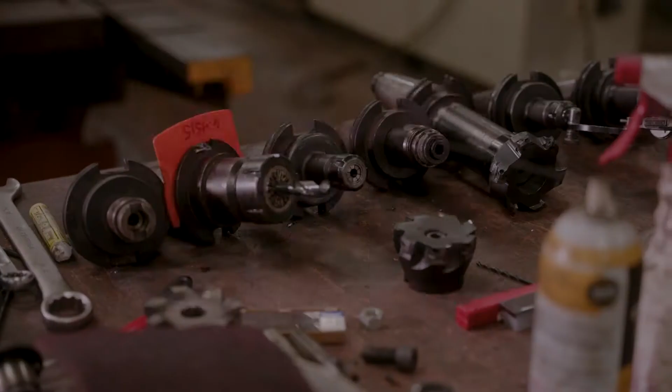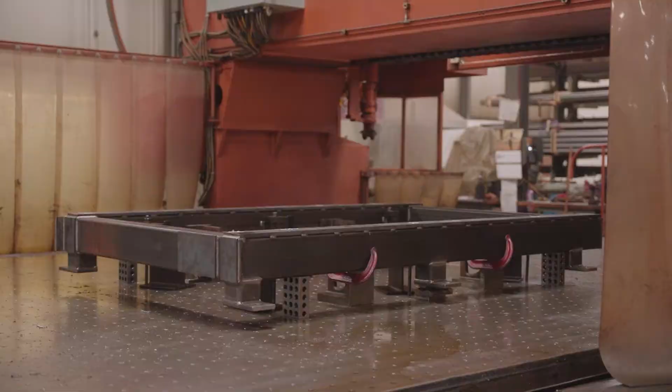Our niche is the woodworking industry. My father, Tom, started out in the woodworking industry and had a natural interest in engineering and building machines, so he married those two together, and that's why we're building woodworking machinery.

The equipment that we build easily translates to other industries as well. We deal in a lot of different sectors within woodworking: countertops, kitchen cabinets, doors, windows, hardwood flooring, building siding, all sorts of different products.

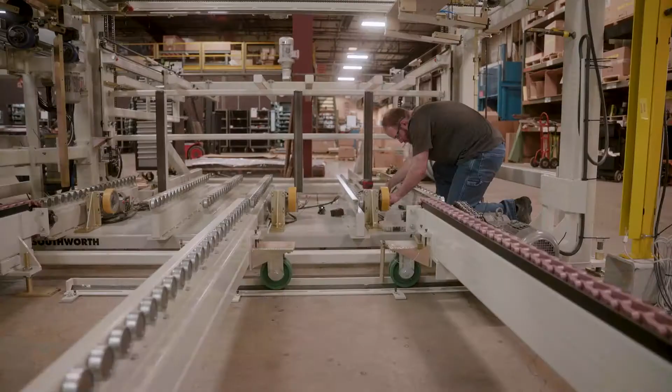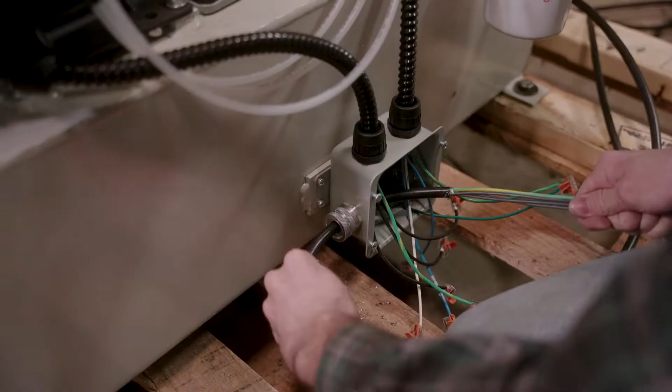We want to build the highest quality machinery we can for what the customer can afford. We also design and build it as if we have to run it and maintain it ourselves. It was his goal to provide a specific need in the industry and to make machines that were affordable but yet dependable, reliable, and machines that could be maintained with basic equipment, basic tools.

It's quality equipment. If you build it right, it'll last a long time. It's not throwaway equipment where you expect to get 5-10 years out of it and cut it all apart and make it into scrap metal.

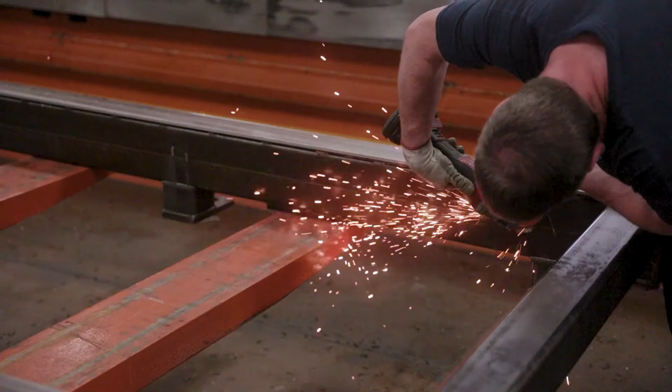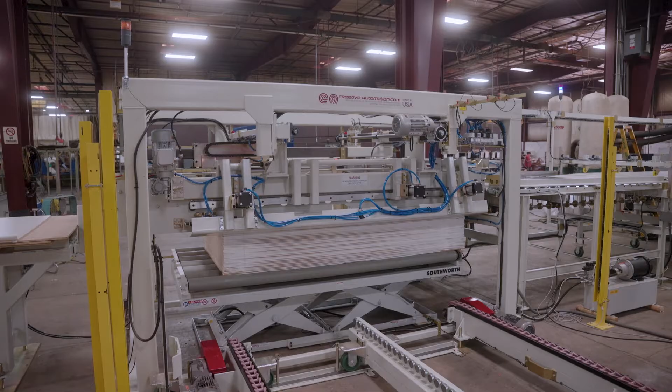About half of what we build is automated material handling equipment. So it consists of things like vacuum pick and place machines, conveyors, turning devices, stuff like that. Basically we're feeding the customer's product into lines, transferring it between machines, sometimes into and out of machines that we don't build, but we system integrate, and then stacking at the end. So that's about half of what we build.

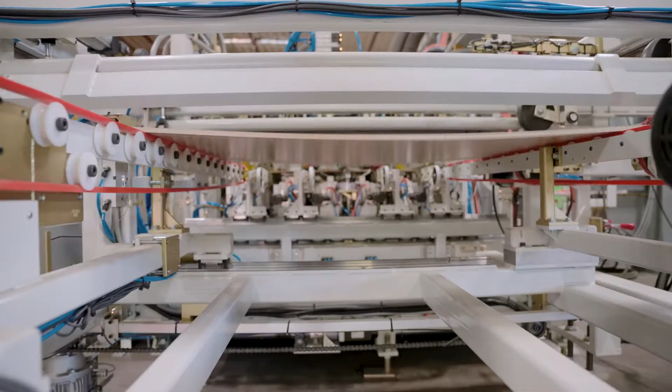And the other half is custom processing equipment where we're changing the state of the customer's product. We might be doing things like sawing, routing, screw driving, drilling. We might be extruding, aiding in assembly.

Our philosophy is we are going to provide exactly what the customer needs. We build custom equipment, customized to their product, the way they do things, their plant layout, everything. We ask more questions than most companies. If you're really going to provide the customer what they need, you have to really understand what their needs are.

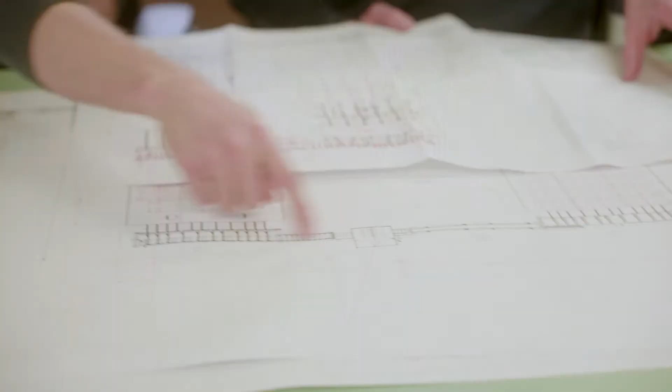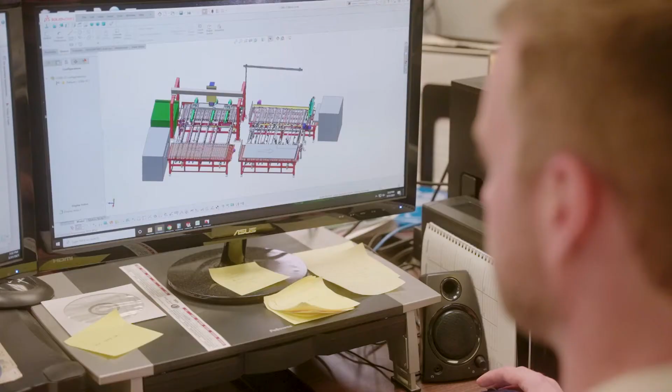We design it and build it as if we were going to be the recipients of that line of equipment, as if we were going to run it and had to maintain it. We're going to ask a lot of questions up front. We want to know exactly what they want to do. That's something that a lot of salesmen that sell machinery don't do, because we're the engineers that actually engineer it. So we're asking the questions up front so that the customer gets what they're looking for.

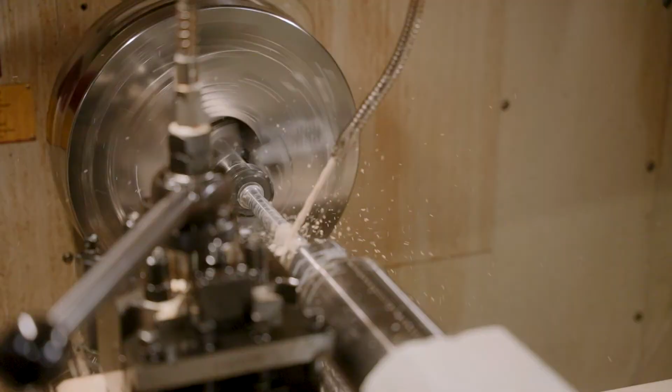We're building what the customer needs. I see often where people adapt to the equipment they can buy. What we do is we say, what do you want to do? And then we design and build equipment to do that, which I think is a lot different.

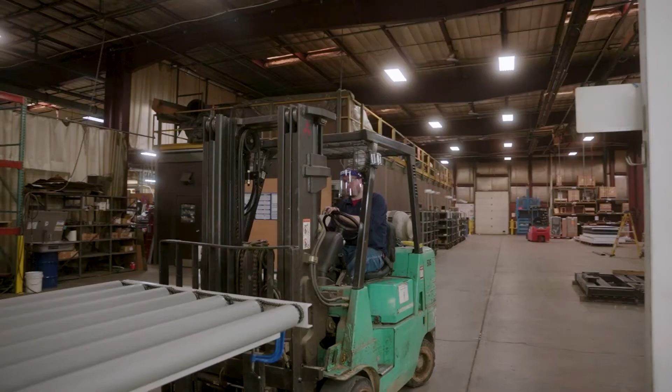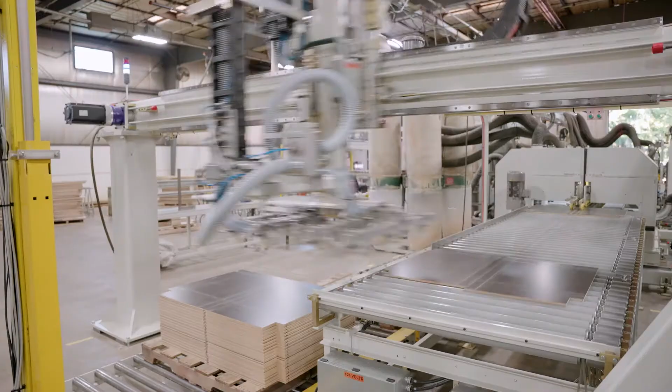If you look at the equipment that's been built over the years, it's usually made considerably stronger than it would really need to be, but that contributes to the longevity of the machinery. You want to build good equipment that people trust. We're going to make sure it's what you want. We'll make it how the customer wants it.

First of all, we're right here where the customer is. It's obvious we speak the same language. Parts are available here. We support our equipment from the day it's built till the day it's not needed anymore. Most of the foreign manufacturers don't do that. After a certain number of years, they don't support the electronics on their equipment, but we do. We can make parts and we don't have to go through customs, we don't have to go across the ocean to get them to you.

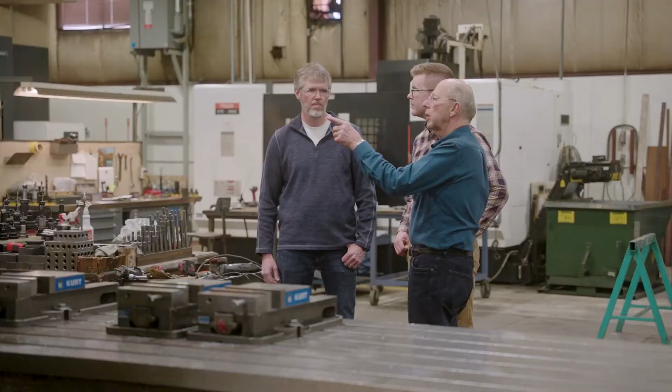A good share of our competitors are from Europe, and there are just some inherent challenges because of that, due to the difference in time zones and sometimes language barrier as well. When you're working with Creative Automation, you're working with an American company who speaks not only the language of English, but we're speaking the language of machinery.

We share ideas. We have a common goal. It's very rewarding when I see other people having ideas. I don't want to have all the ideas. And it's really encouraging to me to go and work with people like that. We work together and we get problems solved. There are no egos in this place. We don't like egos in this place.

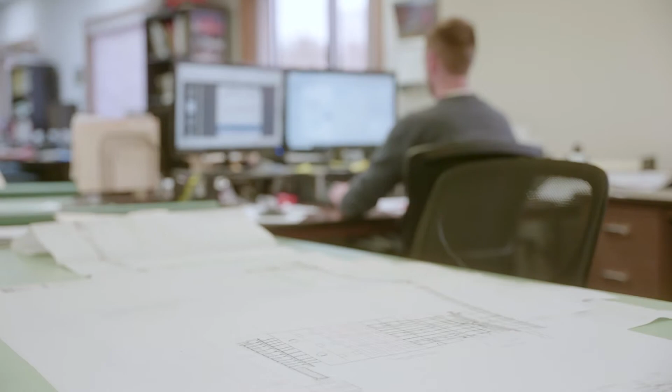Each department has ready access to the other. And because of that, we are constantly asking each other questions. There are constant discussions going on between departments throughout the day. It's truly a collaborative environment.

There was an engineer back when I started that worked here that made a comment that's kind of stuck with me: I don't care if Irva, our cleaning lady, gives me an idea. If it's a good idea, I'm going to use it.

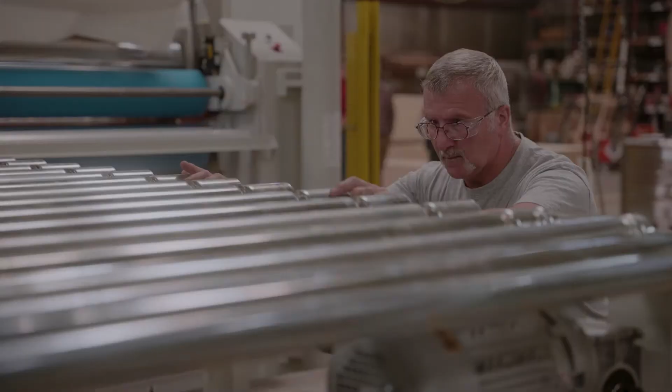When we install a piece of equipment, we don't leave once it's powered up. We are there for the long haul. We get it up and running to customer satisfaction. Really a hallmark of Creative Automation is customer support, service after the sale. Inevitably, issues arise, we get that. With Creative Automation equipment, there should be less issues.

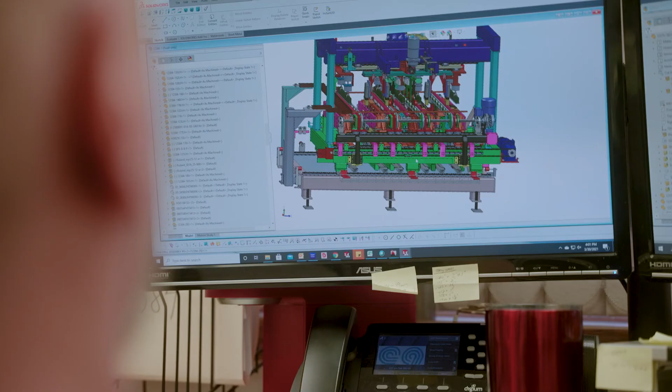We make our engineers available to do the customer support, to do the tech support. Chances are the electrical engineer who programmed and installed your machine is the one you're going to talk to for technical support. You're not going to run into a situation where the person you talk to knows less about the machine than what you do. Our philosophy here is that if a customer has a breakdown, they have the highest priority.